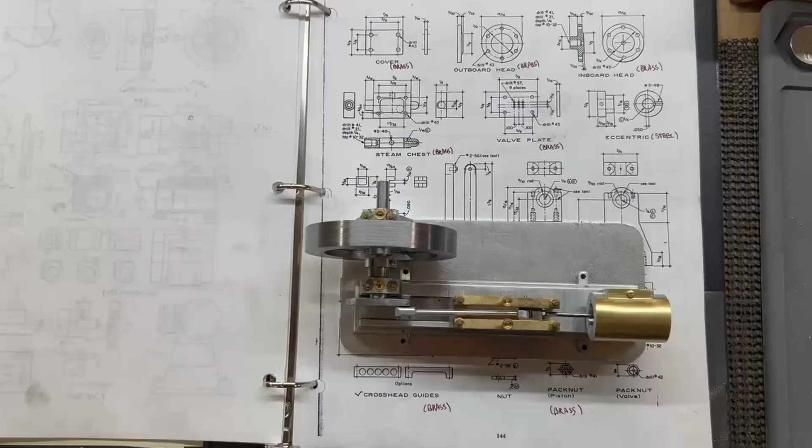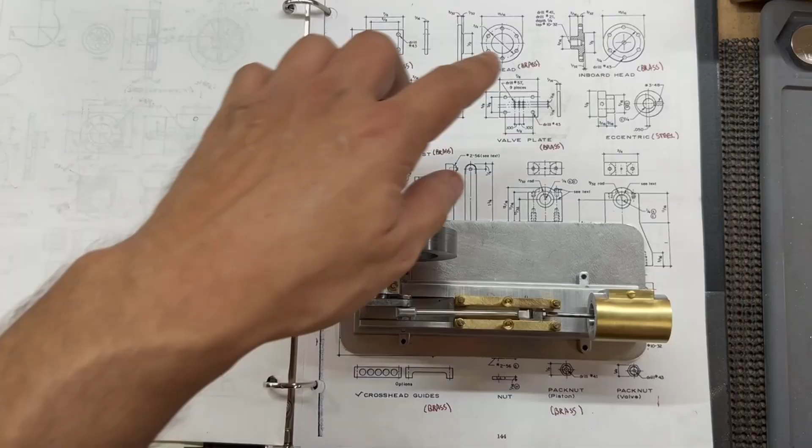Last time we finished up the lagging on this cylinder. We got all the ports and everything drilled. So today we're going to work on the inner and outer cylinder heads here, so we can get those super glued on and then go ahead and get the rest of the holes drilled and tapped, and then we'll get some studs in here to hold some nuts to hold these heads on. So we'll get this thing set up in the lathe and start machining on it.

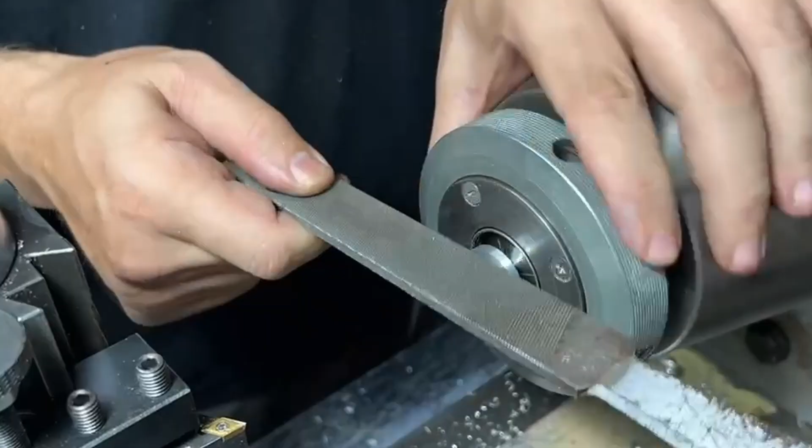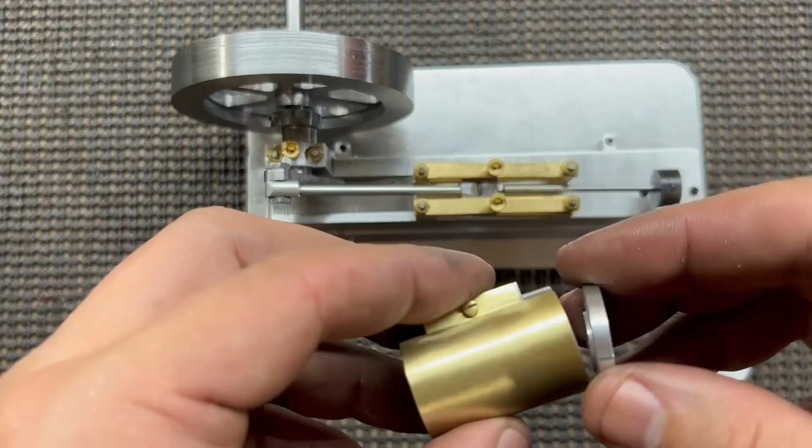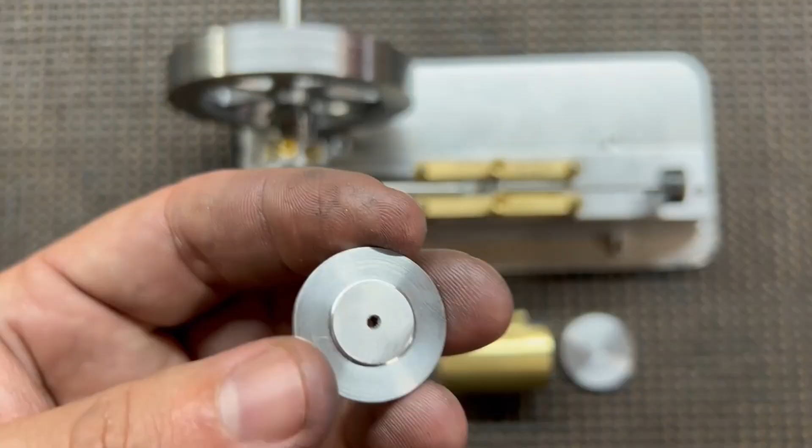Okay, so I got the cylinder heads done. This is the outer, and this is the inner. So the piston rod will travel through here, and there's a brass nut that we'll make that goes in there, and some packing that'll go around there. So that's threaded 10-32. What we need to do now is drill 6 holes through this to mount this head to the cylinder.

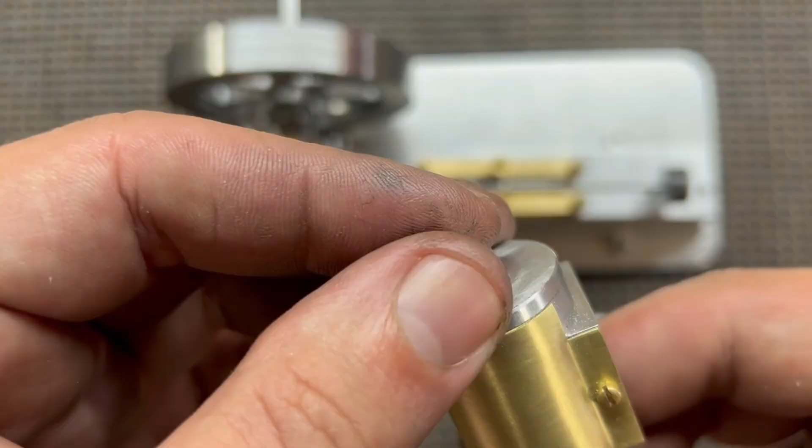So my plan is to mount the cylinder on this expanding arbor. I'm going to put this arbor in here and tighten this up, and then we're going to super glue the cylinder head to the cylinder. Then I'm going to set this up in an indexer. I've got an indexer that takes a 5C collet, so I can put this 1/2 inch arbor in a 5C collet, and then I've got it set to index for 6 holes.

So then we'll line it up on our mark where it needs to be. We'll get it centered up, and then we'll move over. It's a 3/4 bolt circle, so we'll move over half of that, and then we'll drill our hole, and then we'll index it, drill another hole, index it, drill another hole. Keep going till we get all 6 of them.

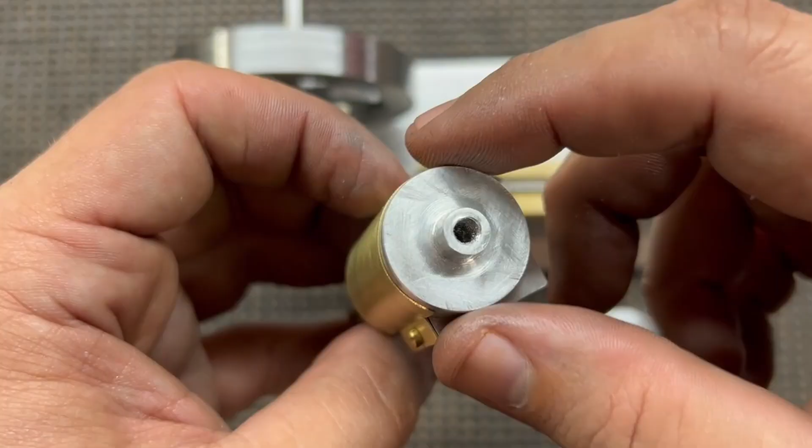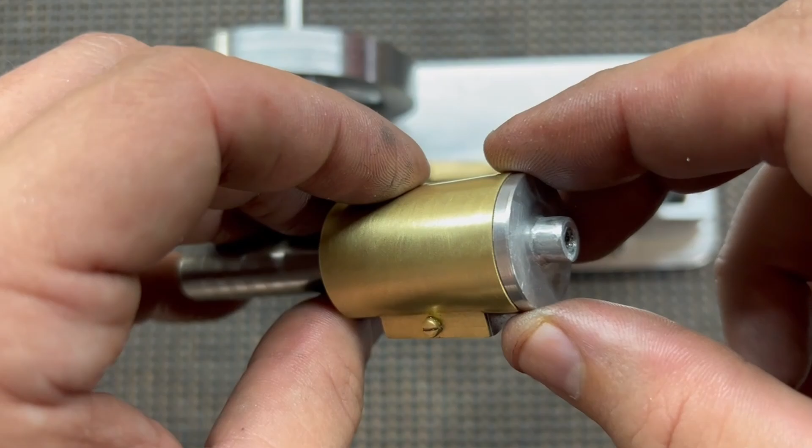Then we'll just reverse the operation, glue this cylinder head on, and do the same thing for that cylinder head. So we'll get that set up and get the holes drilled, and then get them tapped. We'll drill through with the tap drill size, and then we'll drill through just the cylinder head for the clearance drill size, and then we'll get it tapped, and then we have to make up some studs, and then we'll get these cylinder heads bolted on.

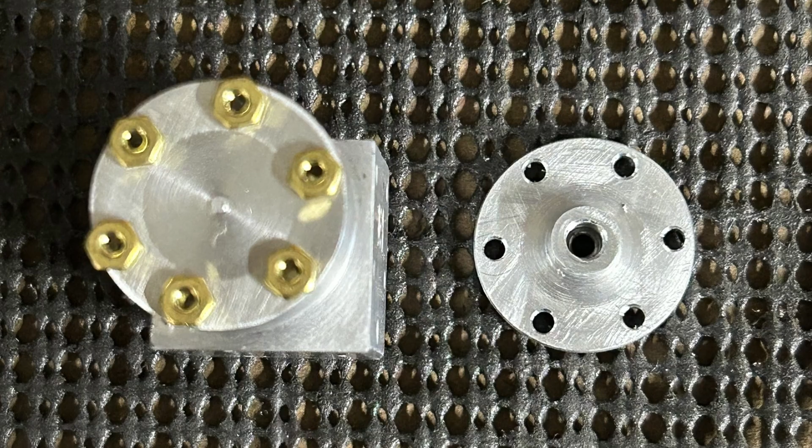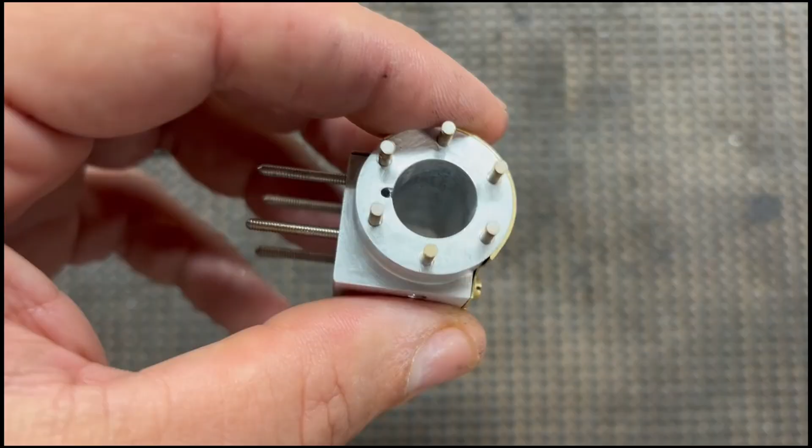Okay, so we got those holes drilled and tapped and got the studs installed. It worked really good doing it in the indexer. Had it set to 6 positions, and then I just drill one hole, then lift the pin up and index it to the next hole. I don't get to use that indexer a lot, so that was fun to use. It takes a 5C collet.

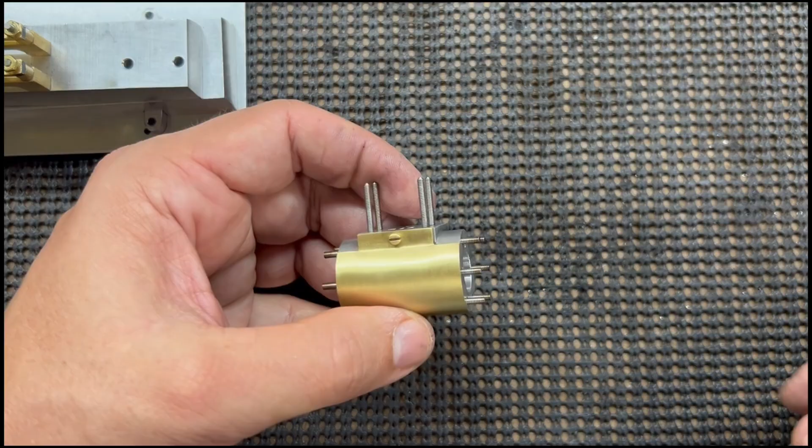But if you don't have an indexer, you could also use a hex 5C collet if you want to hold it in an arbor and put it in the hex collet, and then you can position the hex collet around and do it, or you can just lay it out and do it, just hold it, drill it and tap it.

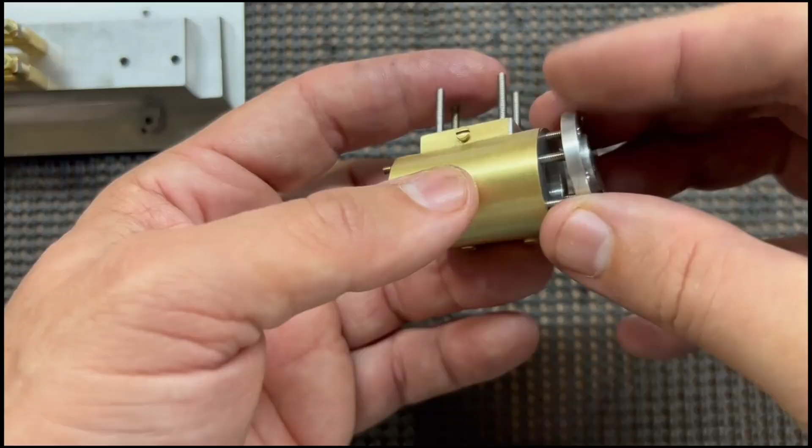And these are just 2-56 studs. Bolts would work also, I just chose to use studs on this one. So we'll see how the head's gonna fit. That's gonna look good. Get some nuts on there. So let's get this cylinder bolted on and get everything together and see how it's all gonna fit.

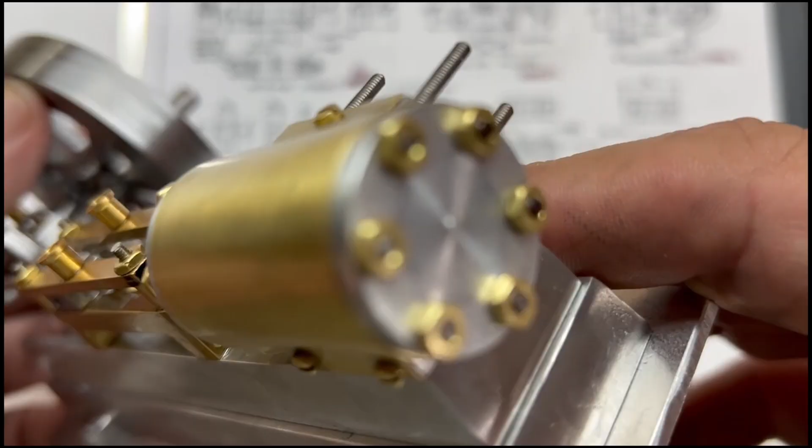Okay, so I got everything bolted on. Got the cylinder bolted on, and the cylinder heads, front and the rear. And everything still works smoothly, still moves good, no binding, so that's good.

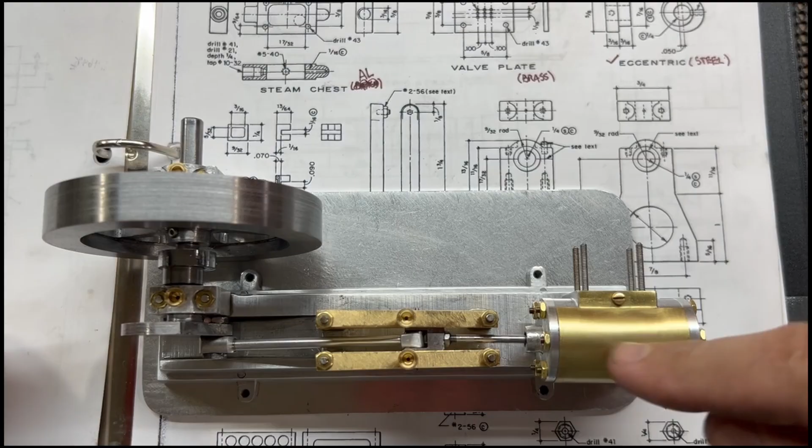Had to adjust the piston position here. You want, when it stops at bottom dead center and top dead center, about the same distance between the piston and the end of the cylinder at the top and the bottom. So you want to center the travel of it in the cylinder. Had to adjust it just a little bit.

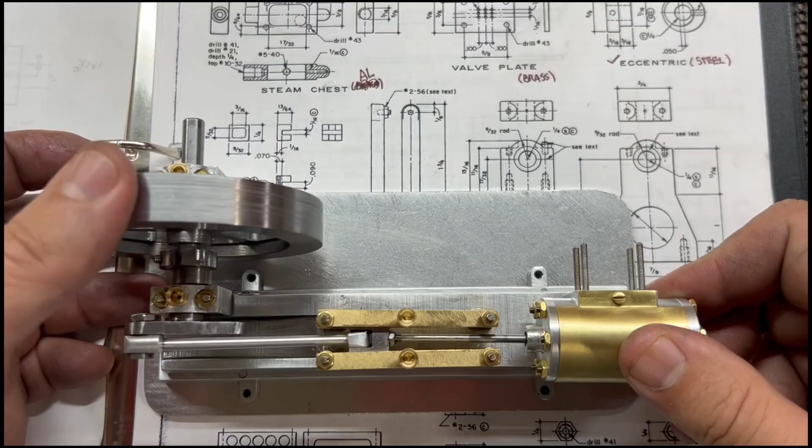And it is really tight on this rear cylinder head. There's only like a couple thou larger than what you drill versus the rod, which we will eventually make a packing nut to go in there to help seal that off. Everything works smoothly, fits good. Got the studs in there for the steam chest.

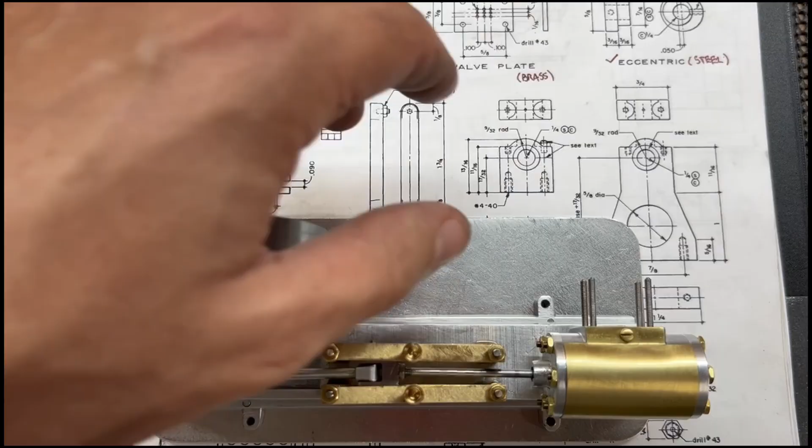So that's the next thing we're going to work on, is the steam chest. There's a piece of brass that gets 9 holes drilled in the center, and then 4 holes drilled where it will slide onto these studs. So there's a piece of brass, and these 9 holes line up with the ports and the 3 holes in the center here.

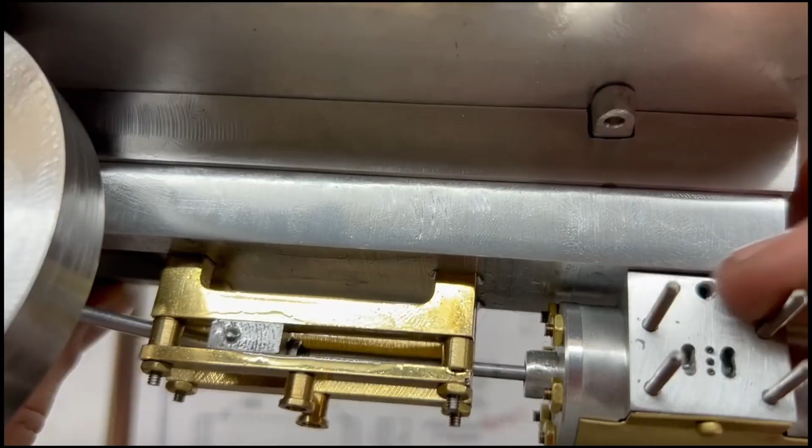And then there's a piece of aluminum. Well, you can make this out of whatever. I'm going to make my inner piece out of brass, and then the actual steam chest out of aluminum, the valve plate out of brass, the steam chest out of aluminum, and then the cover out of brass. These are 1/16 thick, and this is 1/4 inch thick.

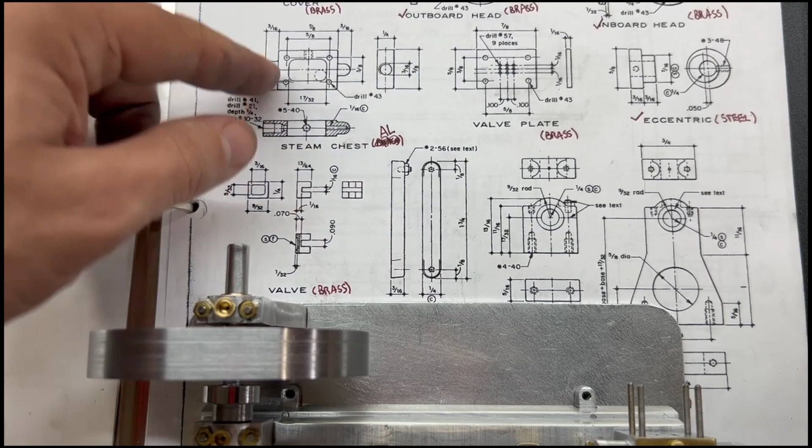So I got a scrap piece of aluminum here that's 1/4 inch thick that we'll cut off for the steam chest. So once we get it to overall dimensions on the bandsaw, then we need to put it in the 4-jaw chuck and turn a round section on both ends, and then it gets drilled through to give clearance, to give a place for the valve rod.

Same thing on the cover here, we'll get this sawed out. My plan is to super glue all 3 of these pieces together to drill these 4 holes for the studs at the same time so that everything lines up. We'll get these cut to overall dimension and drill these holes.

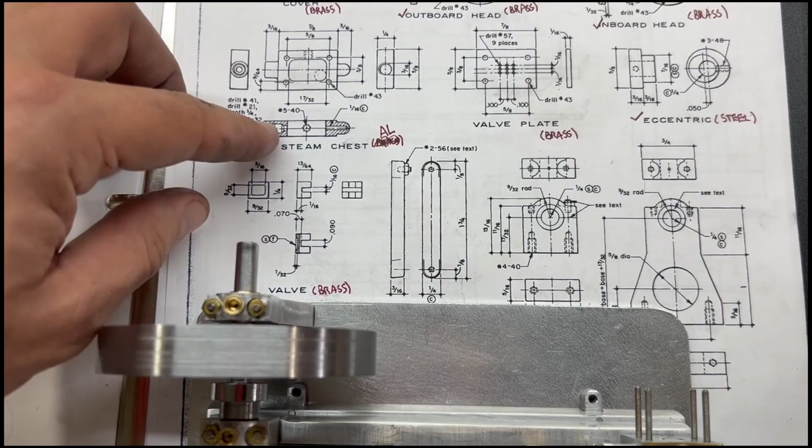Then we'll drill these holes, and come back and get a section machined out in the middle. Probably drill these corners first and then mill all of this out. It gets a hole drilled and tapped from the top for the steam inlet, tapped 5-40. Then it gets drilled and tapped a 10-32 from this end for another packing nut, and for clearance for the valve rod. So we'll get all this band sawed out and then start drilling some holes in it.

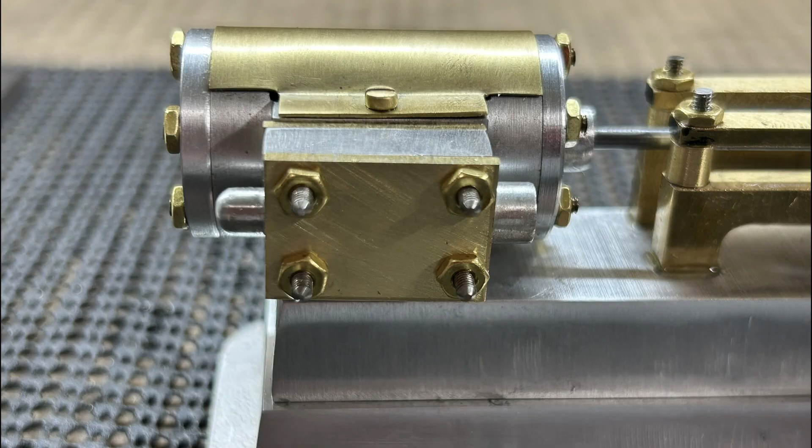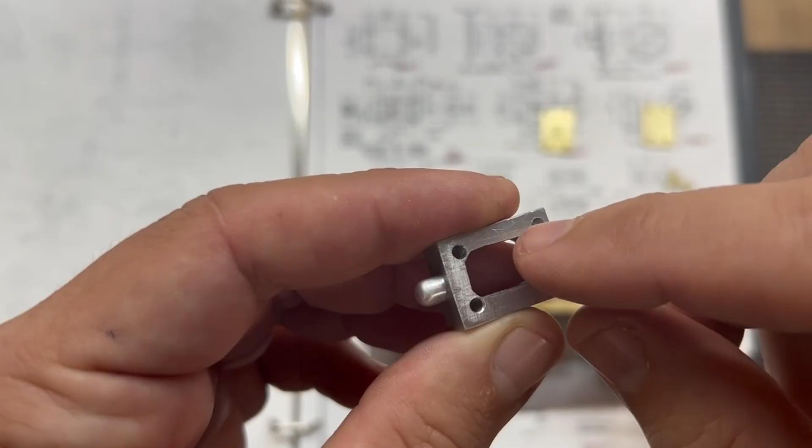Okay, so we got the steam chest machined here. To make this inside section, I took it to the drill press and drilled all four corners and then drilled a section out in the middle, taking out the majority of the material.

As an alternative, you could machine this out, but I decided to do this with just files after drilling the holes. I had layout lines on here, filed it to these layout lines, and then cleaned it up a little bit with the Dremel.

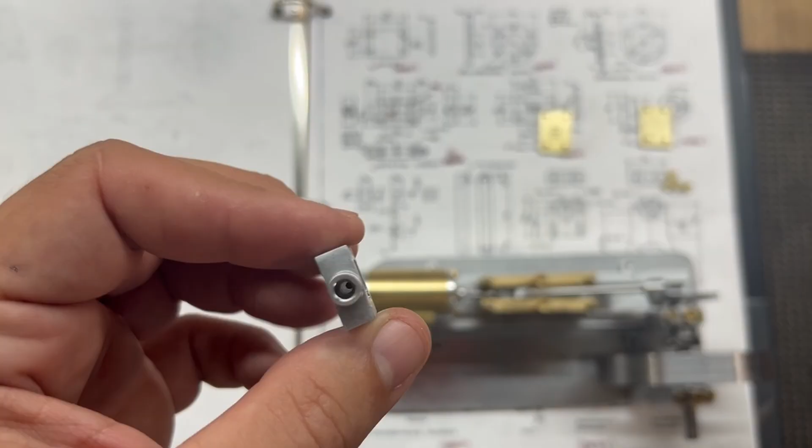So then we went back to the lathe, put it in the 4-jaw chuck, turned this section down here, and then drilled it for clearance for the valve rod. Then tapped it, drilled it, and tapped it for our packing nut, and then drilled through on this end for the end of the valve rod. Then I flipped it back around.

To center this up in the 4-jaw chuck, I used a dial indicator instead of putting a center in it and using the dead center. I checked it side to side - you can rock it back and forth and find the high point. Then center this up and check it here to get it centered. Just rock it until you find the high point and check again to make sure this didn't move any.

So then we cut this down round, and it gets kind of a sphere on the end. I didn't have a corner radius tool that was the right size, but I had one that was close. So I cut what I could with that and finished it off with a file and some sandpaper. Then drilled and tapped a 5-40 hole in the top for the port for the inlet there. That finished up that piece.

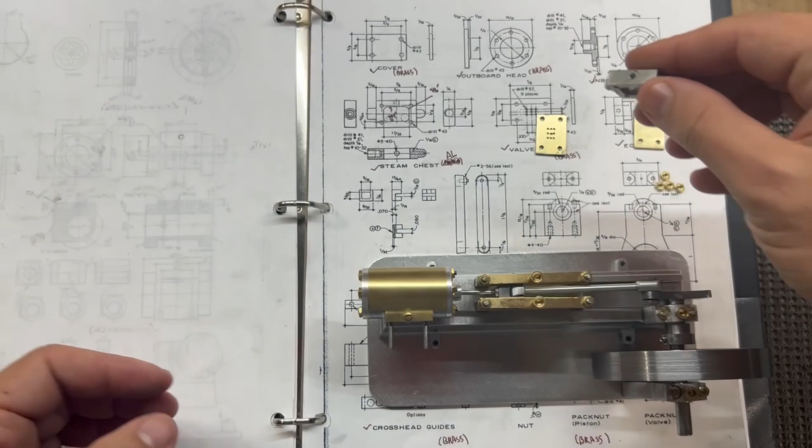Then the two brass pieces here - this one gets 9 holes drilled in it that line up to our ports, and then the cover. I super glued these two pieces to the aluminum and drilled these corner holes, the mounting holes, together so that they would all stay lined up.

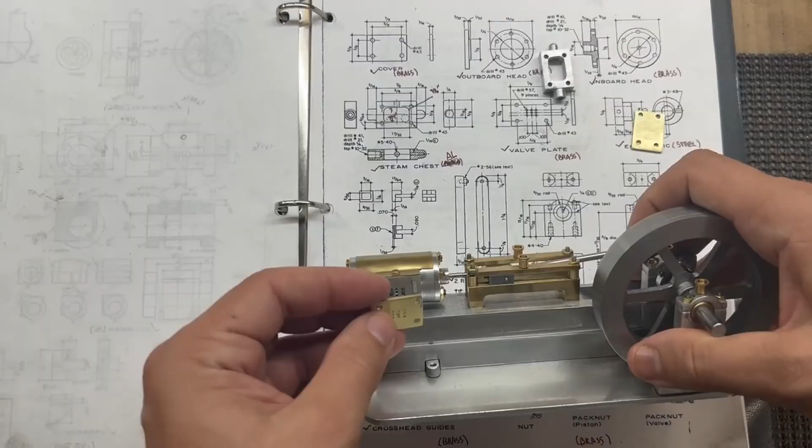So if we put this piece on here, you can see the holes that we have, and then these line up with it. The 3 holes in the middle, I know it's hard to see on camera, line up with the center holes, and these 3 holes on the outer edges line up with the ports.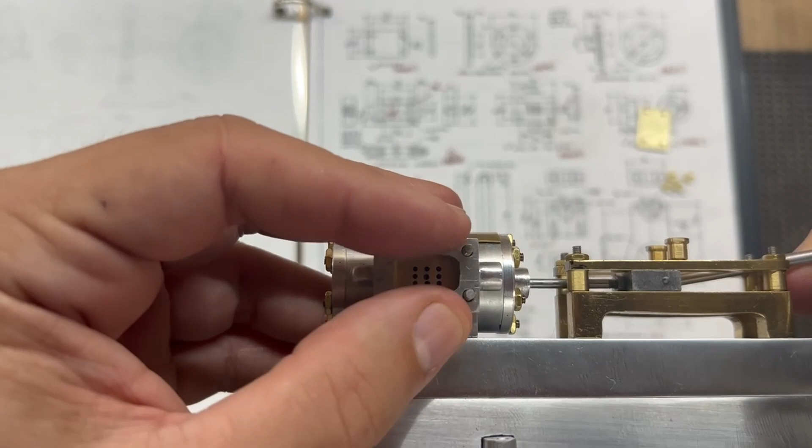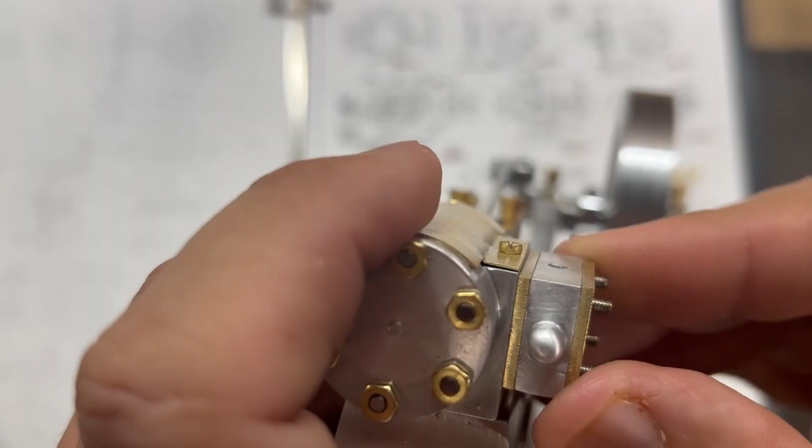So then we get this piece on here. Our valve will go inside of here and work back and forth. And then we have the cover. So you can see how that all goes together and kind of sandwiches all of it in between there.

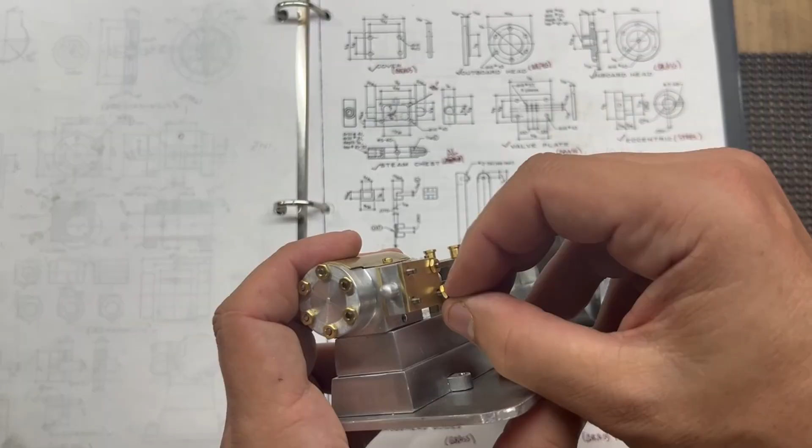And then we got our 2-56 studs here, and nuts that go on the end. I will probably put a gasket on this - I think I've got some pretty thin gasket material. I don't want to put too much because then it'll move everything out too far. I might see how it runs first and then decide. But if I do, I'll put a real thin gasket on there once we get all the valve timing set.

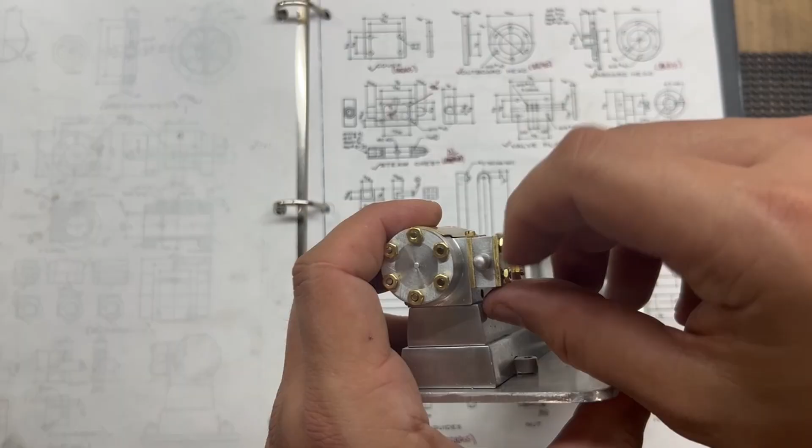Get these nuts on here, and we'll just snug that up a little bit. So there we go, that's the steam chest complete.

So you can see our inlet here and then our exhaust here. We'll eventually make some brass pieces that screw into there to hook a hose to, because I'm going to run this on air on the top, and then just a brass piece coming out for the exhaust on the bottom.

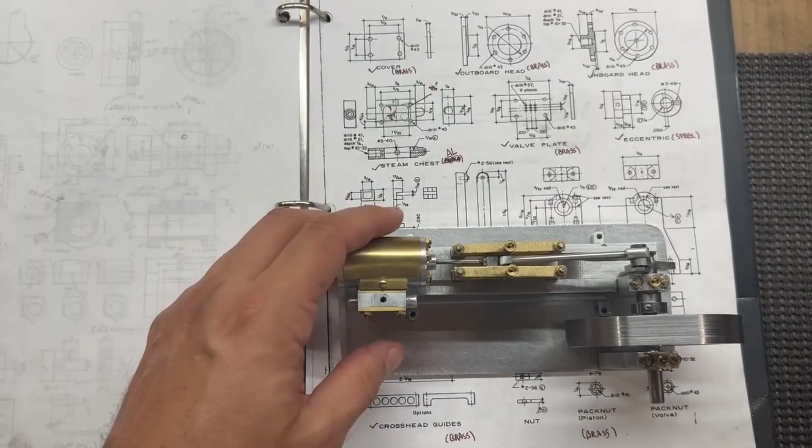So the next thing we're going to work on is making the actual valve, and then we'll eventually connect that to the valve rod, and then back to the eccentric, back to the crankshaft. And then we still need to make our packing nuts. Once all that's complete, we'll have to set all of the timing and then we'll get it running. Thanks for watching.